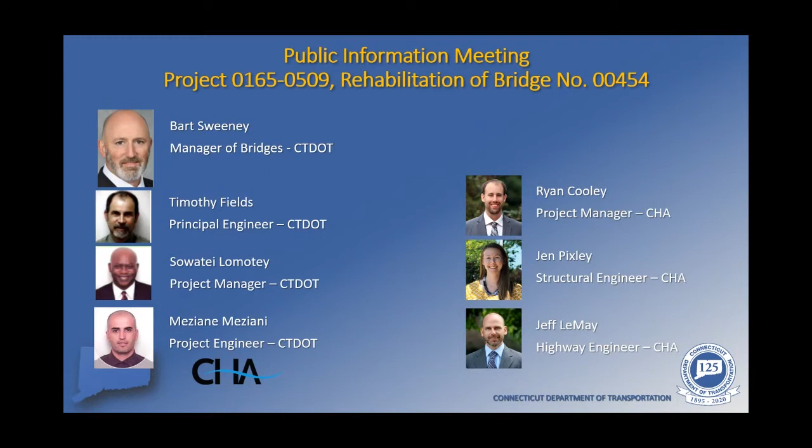The Title 6 of the Civil Rights Act can be found in the link below: portal.ct.gov/DOT/business/contract-vi-page. The Connecticut DOT is committed to ensure that no person shall, on the basis of race, color, or national origin, be excluded from participating or be subject to discrimination under this project.

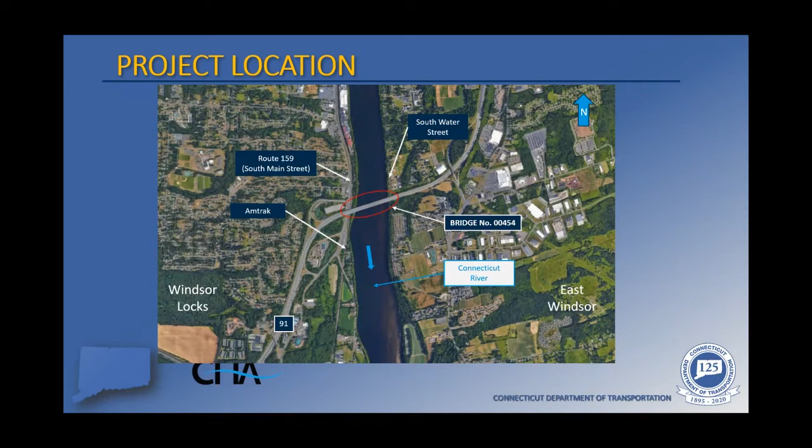A little history of this bridge: it was originally built in 1959 and rehabilitated in 1991. This rehab consisted of a complete deck replacement and a bridge widening. In 2017, the bridge joints were replaced, and in 2019, the bridge had a partial depth resurfacing of the pavement. The bridge is not posted for any weight restrictions currently.

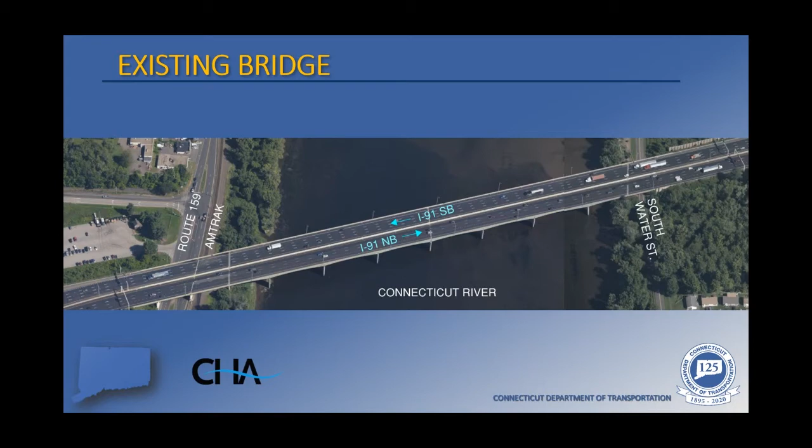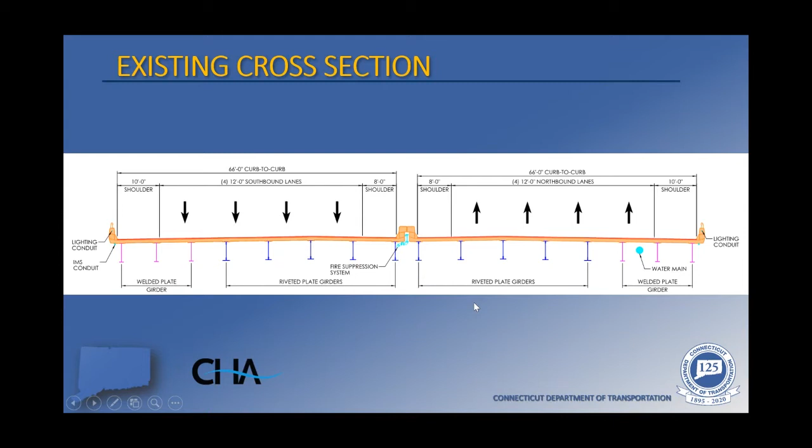Next, several slides are based on the most recent bridge inspection report from September 2019. I think it is important to give an overview of the meaning of the bridge rating system. Each individual element of the bridge is rated on a scale of 1 to 9, a rating of 1 being a state of imminent failure and a rating of 9 being excellent condition. A typical in-service condition bridge showing minimal deterioration will generally rate as 6 for satisfactory or a 7 for good. A rating of 4 is considered poor and initiates the need for replacement or major rehabilitation.

As a reminder, this is a preservation project. The goal is to keep the bridge from dropping below a rating of 5 for any element on the bridge.

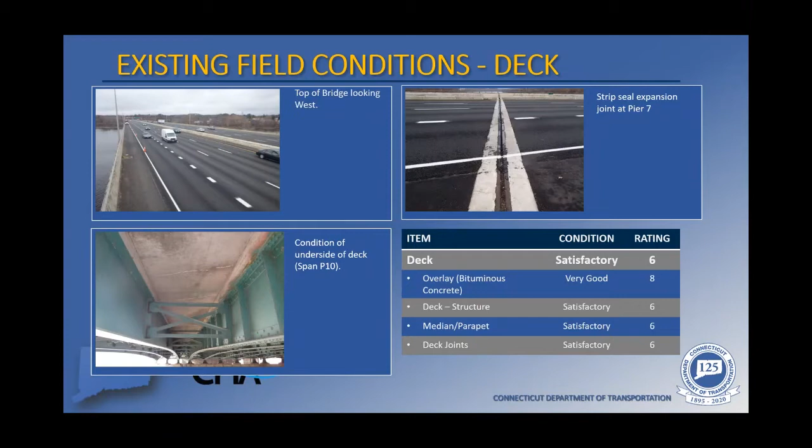From this slide, you can see the existing approaches tend to be in good condition as well. One item to note is the settlement of the approach barriers, which we'll be looking into addressing as part of this project.

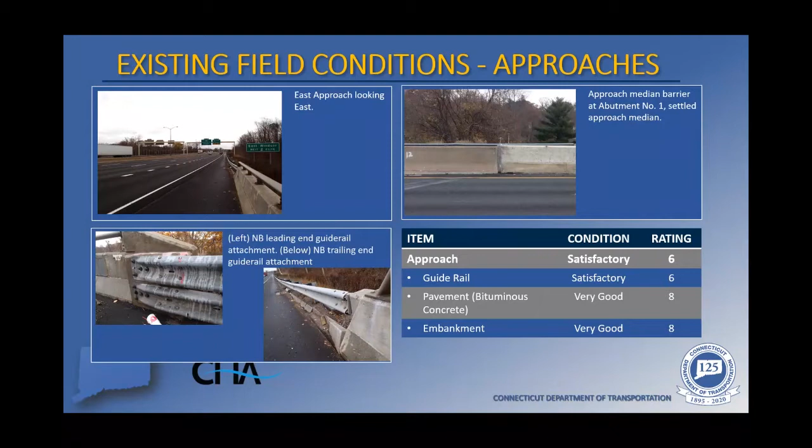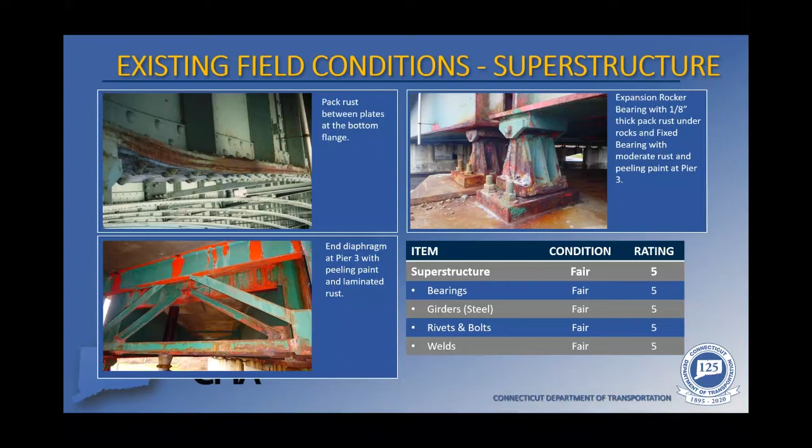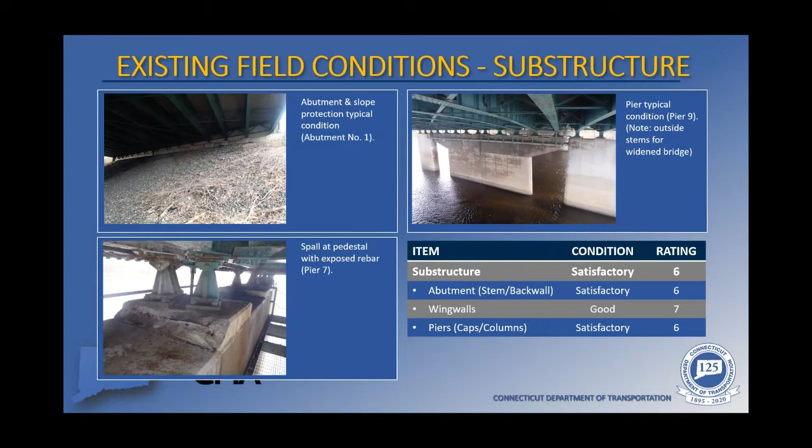This slide outlines the substructure elements, or the concrete piers and abutments holding up the bridge beams and deck, which exhibit areas of fine vertical and horizontal cracks, map cracking, hollow areas, and spalls. Overall, the concrete substructure is in good condition.

The inspection of the channel found isolated areas where the pier footings appear to be exposed along a portion of the north face and east face. No significant erosion along the channel embankments was noted, and there is no apparent change to the channel orientation in this area. Timber debris is present around the piers. Overall, the channel is in good condition.

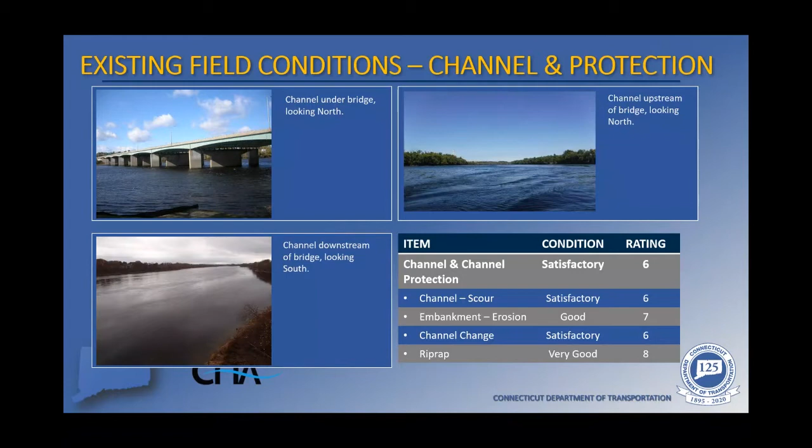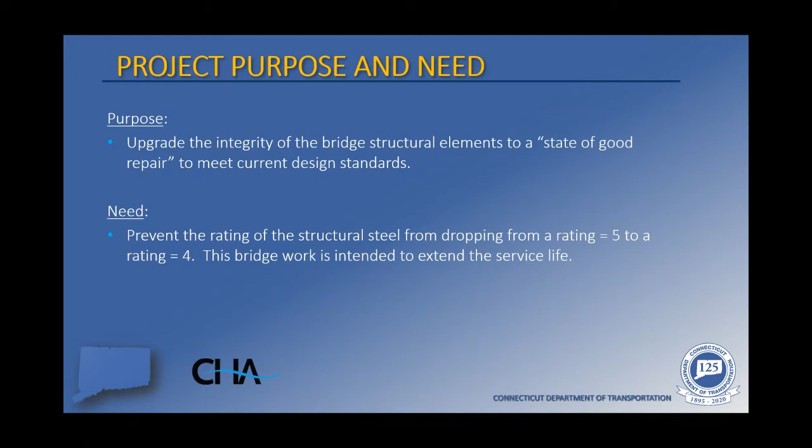Over the next several slides, we will get into a little bit more detail on the repair work for each major element that will be part of this project.

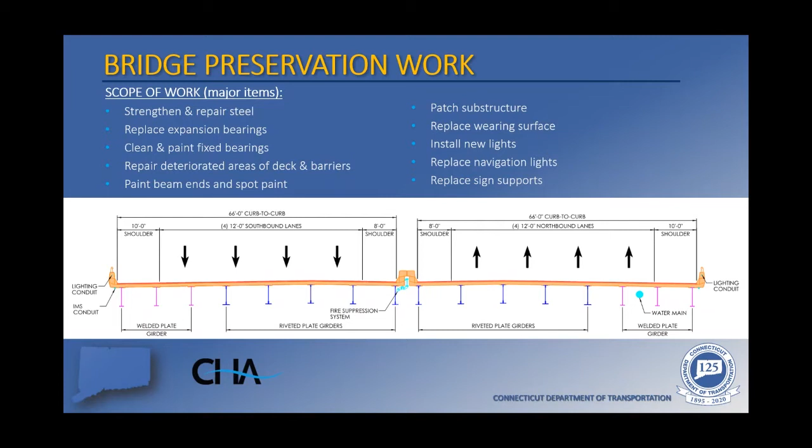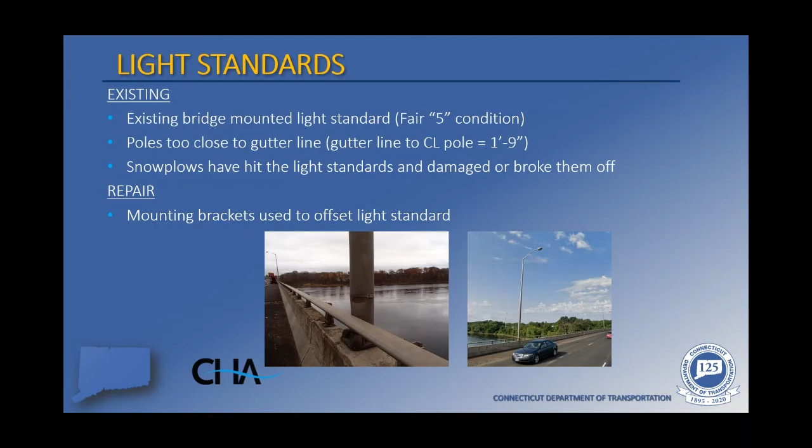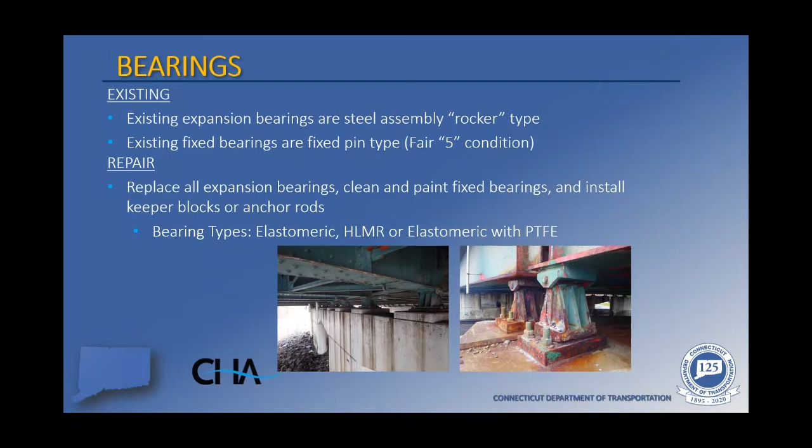The bridge bearings are devices that support the bridge beams and allow for movement in the bridge due to thermal forces as well as rotations from vehicular traffic. Several of the bearings are rated in fair condition and are noted as misaligned or frozen. The goal of this project will be to replace the existing expansion bearings and clean and paint fixed bearings.

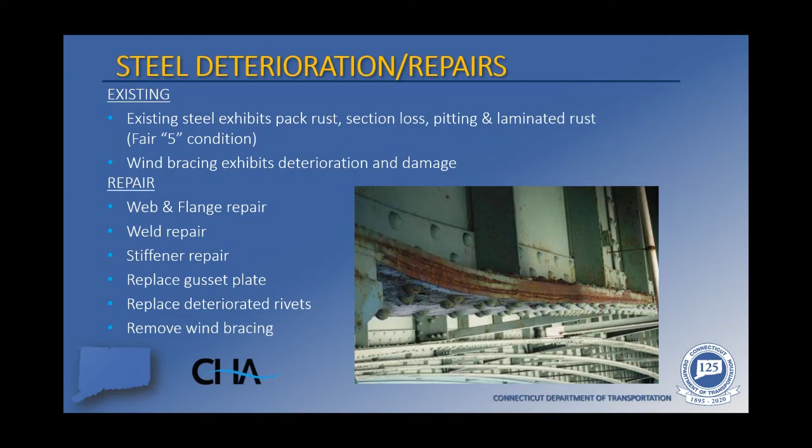CHA will be looking into various methods to repair these beams, ranging from adding steel plates to investigating encasements of the beams to stop deterioration and strengthen them. In addition to general steel repairs to bring the bridge back to a state of good repair, steel strengthening will be performed to bring the structure up to current code standards for various permit vehicles.

CHA will investigate a state-of-the-art repair, which involves encasing sections of the beams in ultra-high performance concrete to provide strength, as well as protecting the steel from the elements in an effort to minimize future deterioration.

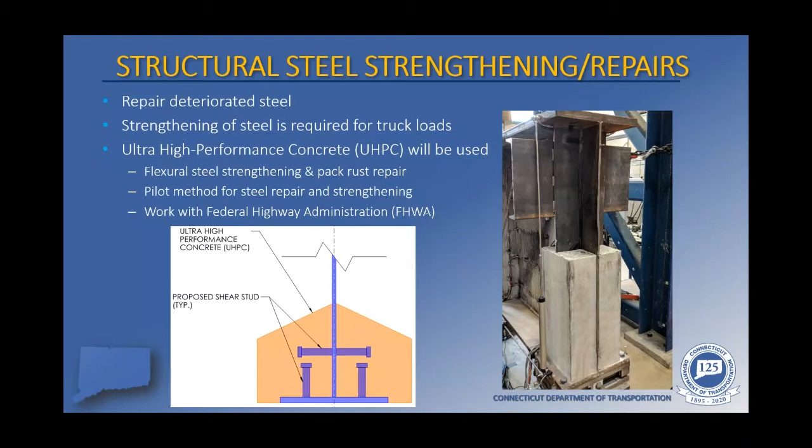After the structural steel repairs and strengthening of the bridge have been completed, the structural steel will be spot painted. The complete structure will not be painted—it's estimated approximately 10% will be spot painted, based on the latest inspection report. Beam ends at the bridge joints will be completely painted for a short distance to protect the steel from water leaking through the joints.

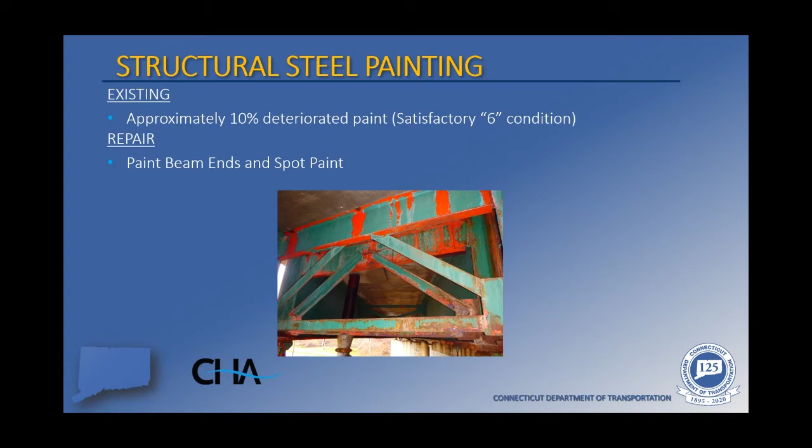During final design, we'll be investigating replacing the sign structures just off of the bridge. These sign structures are beyond their service life and have safety concerns with the posts in the median not meeting standards. CHA will be investigating a new sign support structure that spans the complete highway, eliminating the need for a median post.

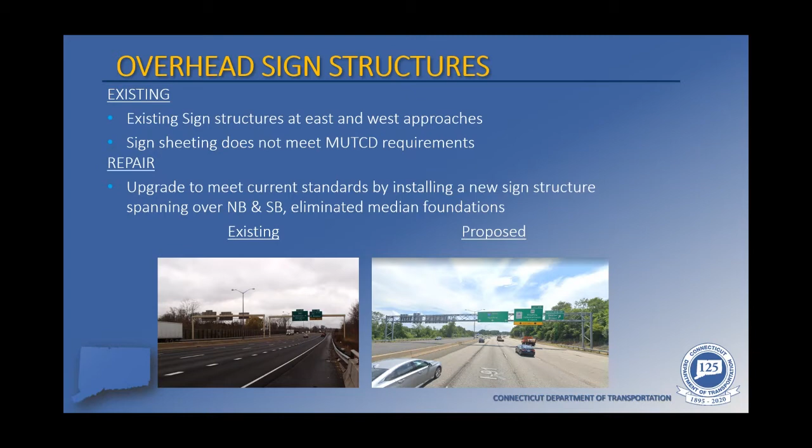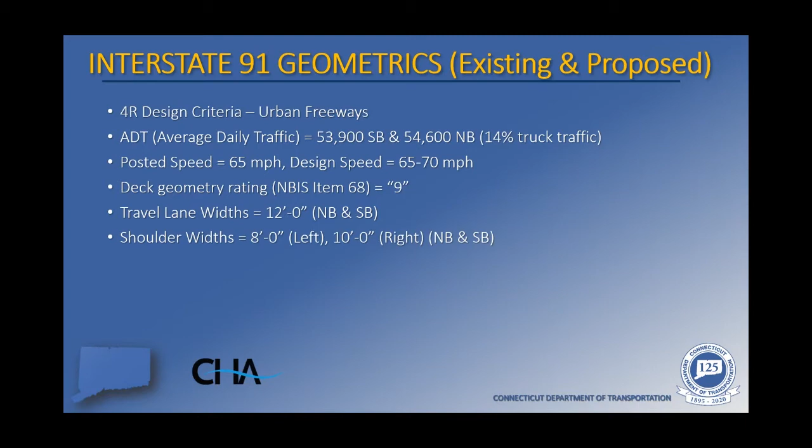A quick overview of the environmental concerns associated with this project. Since this portion of the Connecticut River is an environmentally sensitive area and an essential fish habitat, there will be in-water restrictions for construction. At this time, the only anticipated in-water work will be concrete patching of the piers. We anticipate most of the concrete patching and steel repairs will be done from above, so any environmental impacts from this project are currently anticipated to be minimal.

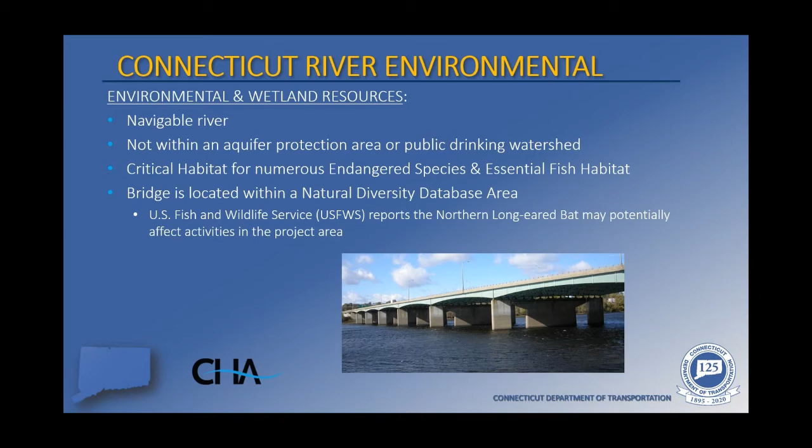Related to the previous slide, the current preliminary list of anticipated permits for this project are the Connecticut DOT Flood Management General Permit, Army Corps of Engineers General Permit, Department of Energy and Environmental Protection Certificate of Permission and Inland Wetland General Permits, as well as the U.S. Coast Guard Construction and Deviation Letters.

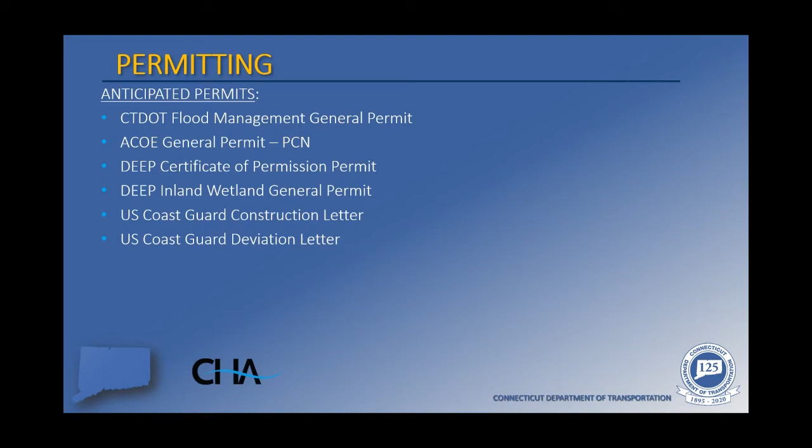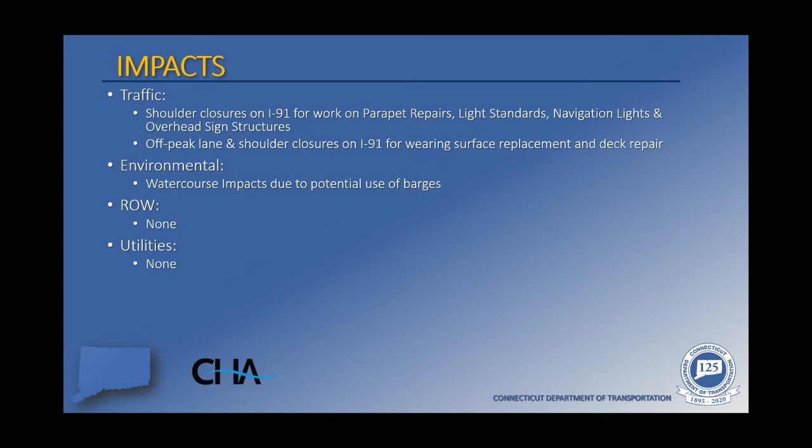The total estimated construction cost for this project is $38,700,000, with 90% of this being federal funds and 10% state funds. The cost and schedule are preliminary and subject to change as we begin the final design phase of this project.

With that, this concludes the technical portion of this presentation.

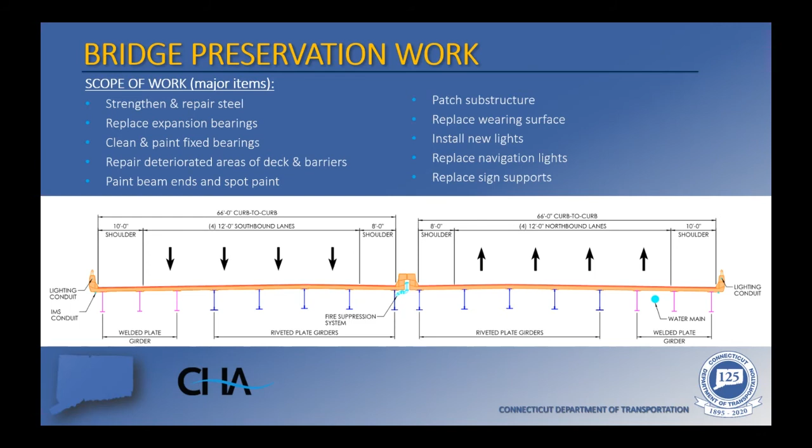For this question, I'm going to go back to our typical section slide. As you can see, there is a 20-inch water main which runs along the full length of the bridge. This water main is not anticipated to be impacted. Also, as part of this project, an IMS conduit will be added to the structure for future use. It is not anticipated that any utilities will be impacted on the local roads at this time.